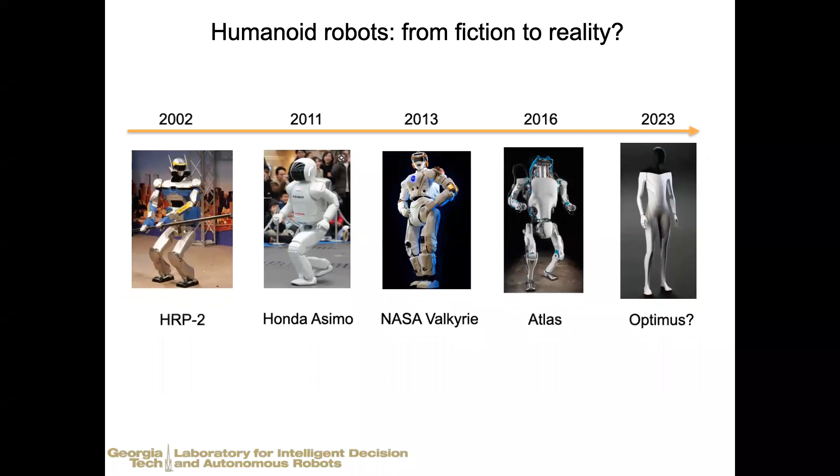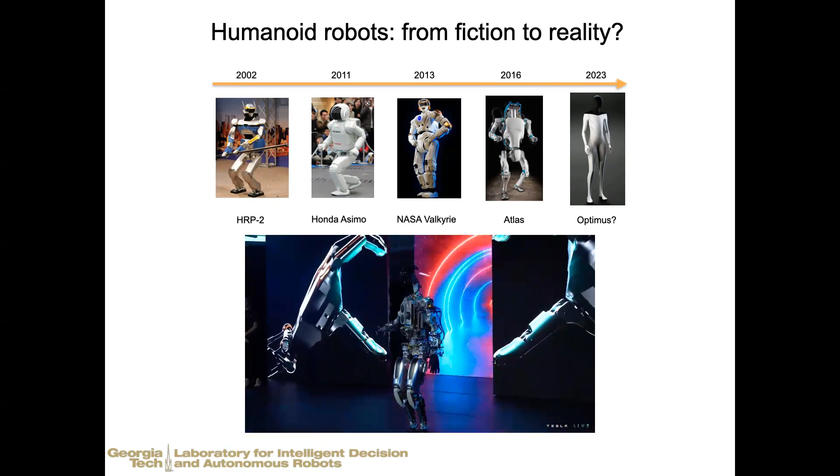If you remember last year at the Tesla AI Day, Elon Musk and his team released their first prototype of the Optimus humanoid robot. Although this first prototype still integrates a lot of existing approaches, like foot placement planning, whole body control, sensing and perception, it's still very impressive. They built this robot from scratch within just 9 months. And hopefully with the continuous effort and dedication of Elon's team, they can really impress our society over the next few years with more mature humanoid robots and behaviors in very complex environments.

Many people in this room are probably seeing a lot of cool videos these days from either Boston Dynamics or Agility. As we can see here, these robots can demonstrate very agile dynamic behaviors in outdoor environments. But there still exist many fundamental challenges at either the theoretical or experimental levels. First, as we know, the dynamics here are highly complex: high dimensional, nonlinear, and underactuated. And a lot of practical issues exist in the real system, such as actuator dynamics, delays and friction, etc.

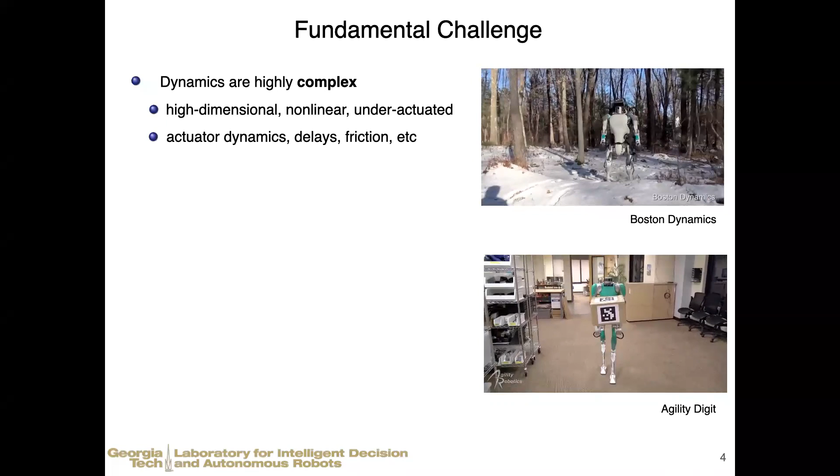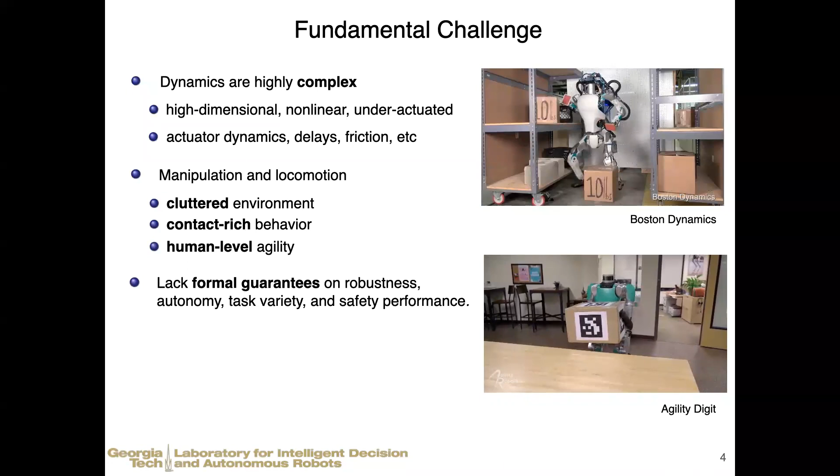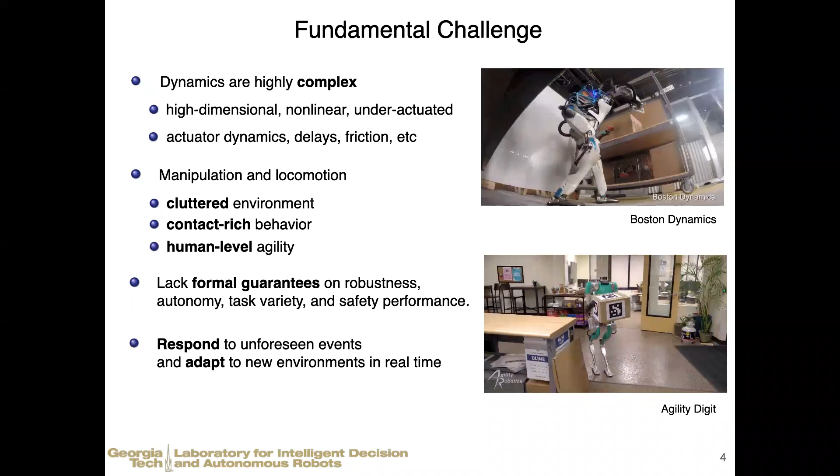And many manipulation and locomotion approaches nowadays are still a little bit far away from the capability of operating in cluttered environments, achieving contact-rich behavior reliably, or even getting close to human-level agility. From the algorithm perspective, many existing approaches still lack formal guarantees on robustness, autonomy, task variety, or even safety performance. So it's very important for us to propose new algorithms such that these robots can respond to unforeseen events reliably and adapt to new environments in real time.

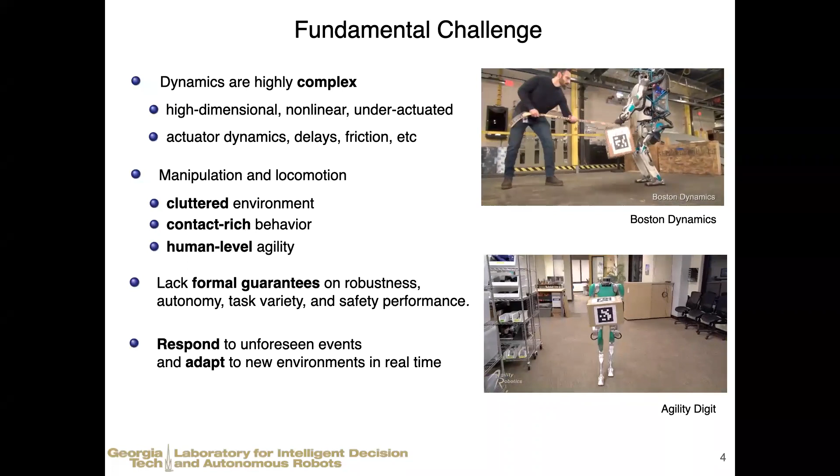So I direct the Laboratory for Intelligent Decision and Autonomous Robots at Georgia Tech. We call it LIDAR group. And we have a large focus on robust task and motion planning, decision-making algorithms for highly agile and dynamic robotic systems, especially on locomotion and manipulation.

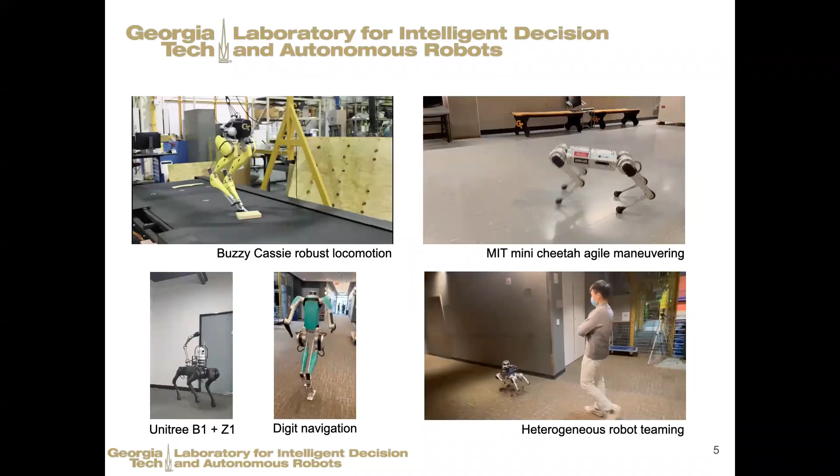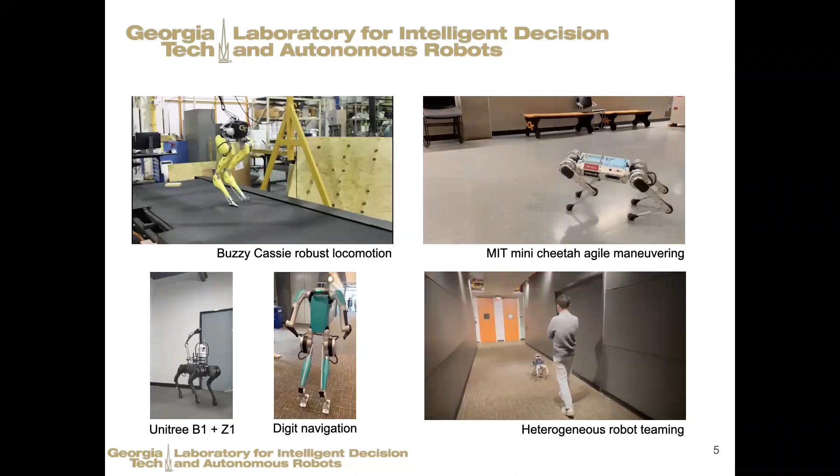And we are particularly interested in contact-rich problems where you have deformable, non-rigid contact or even patch contact problems, as well as heterogeneous robot teaming with hierarchical task, motion, or even mission-level behavior reasoning, replanning, to achieve robust capabilities.

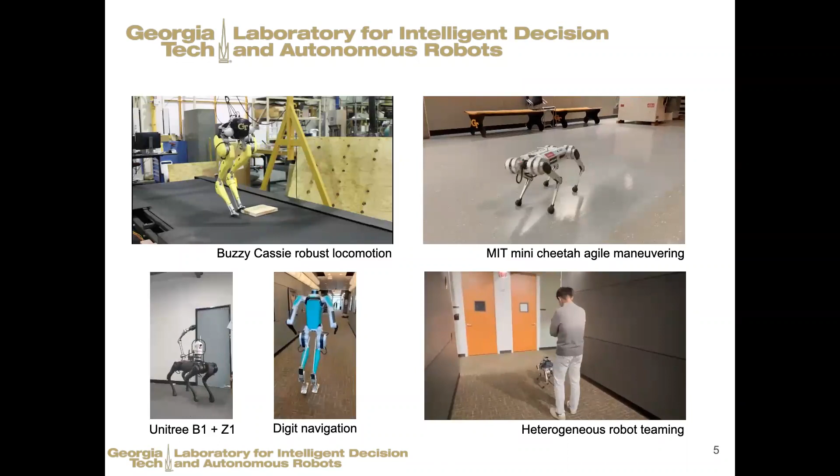So from a very high-level perspective, a fundamental problem we are interested in is what planning and decision-making algorithms do legged or manipulation robots need to achieve agile, robust, safe, or even collaborative behaviors, especially through physical contact. So in today's talk, I'm going to particularly address two questions. One is about hierarchical task and motion planning structure, and the other one is about distributed trajectory optimization.

So the first question is about how we can design this hierarchical TAMP architecture to better reason about robustness, safety, or what people call failure recovery. And I think many times formal guarantees such as safety and provable correctness are only reasoned at a specific layer and really cannot be guaranteed across different planning and control layers. So in this case, how can we design resilient and robust mechanisms to enhance the overall safety and task success rates if we cannot provide 100% safety or even prove it?

And the second question is about trajectory optimization. I would like to talk about some distributed optimization work we have been focusing on these days, and its capability and limits in achieving dynamic consensus, especially for large-scale nonlinear programming problems. So hopefully I can convince you these are important questions to explore by the end of this talk and show some promising results we have achieved so far, if they are not the best ones.

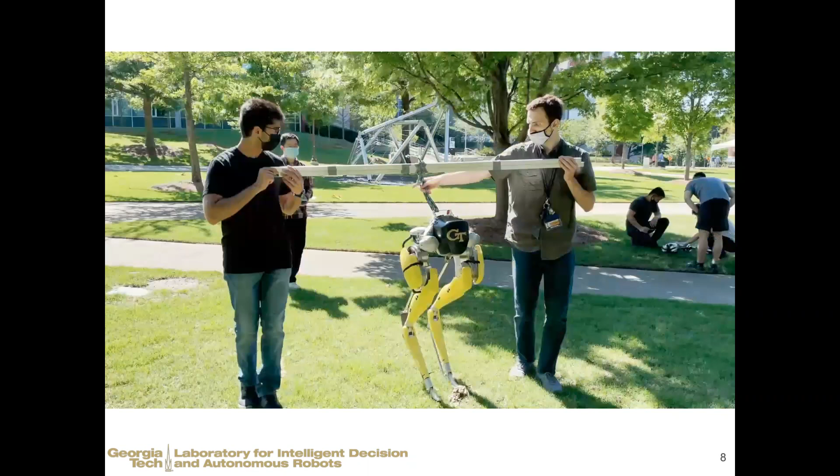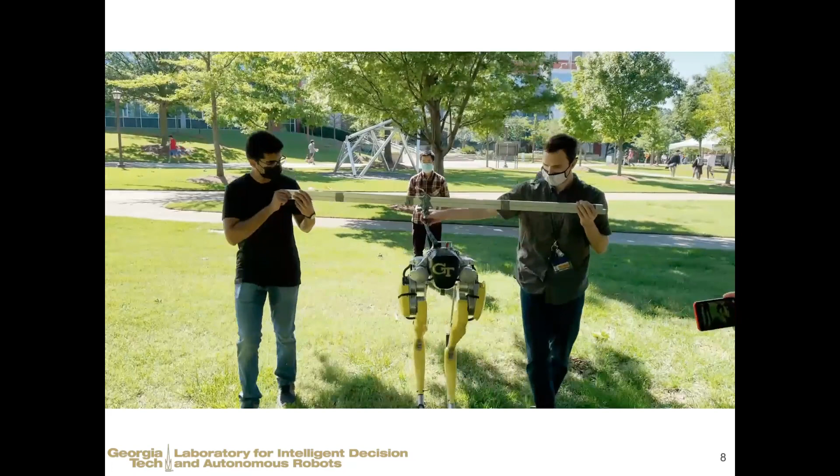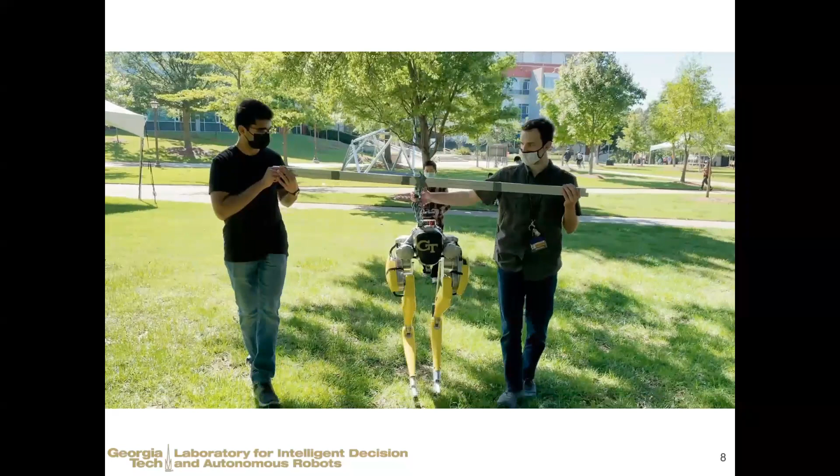All right, so as some of you already know, in the field of dynamic legged locomotion, a series of exciting planning and control frameworks has been proposed, for example, optimization-based planning and control approaches, whole-body operational space control, hybrid zero dynamics, sequential composition, you name it. However, most of these locomotion frameworks have rarely investigated formal decision-making and task planning methods, primarily due to the very challenging underlying complex locomotion dynamics at the lower level.

And these formal decision-making and task planning methods actually have great potential in enabling long-horizon tasks over diverse terrain, as well as very proactive interactions with complex environments or even humans. And so far, these methods have been primarily explored for ground mobile robots, aerial robots, and some manipulation problems, but largely underexplored for legged systems.

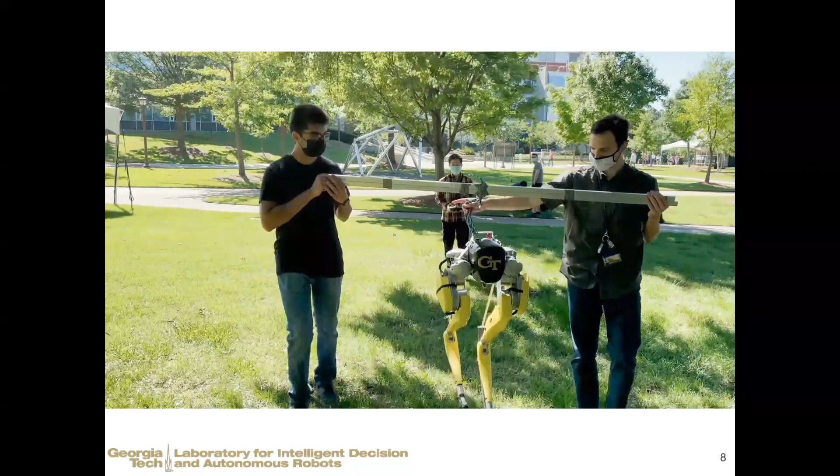So over the past few years, my group has been putting significant effort in this direction, especially for dynamic locomotion problems. So first, I would like to highlight some of our TAMP work. Since 2016, we started to look at what we call the unified whole-body locomotion and manipulation problem from the task and motion planning perspective. We formulate the whole-body locomotion planning problem as a two-player game between the robot and the interactive environment. And here the environment could be adversarial.

For example, you see in this simulation, terrain could get crashed, or a human appears in the scene as an obstacle. And the goal here is to synthesize a winning strategy such that the robot can always win the game, basically meaning successfully maneuver in this very constrained environment. And we employ a formal method called the linear temporal logic approach to synthesize reactive planners, especially to make decisions for the robot contact sequence.

And to really achieve dynamic maneuvering, a fundamental question is how to intelligently identify and compose these complex motions, right? And this motivates us to investigate this template-based agile locomotion method. Here we refer a lot to human motions, especially those seen in parkour and gymnastics. Then we extract the essential dynamics and model the abstracted behaviors.

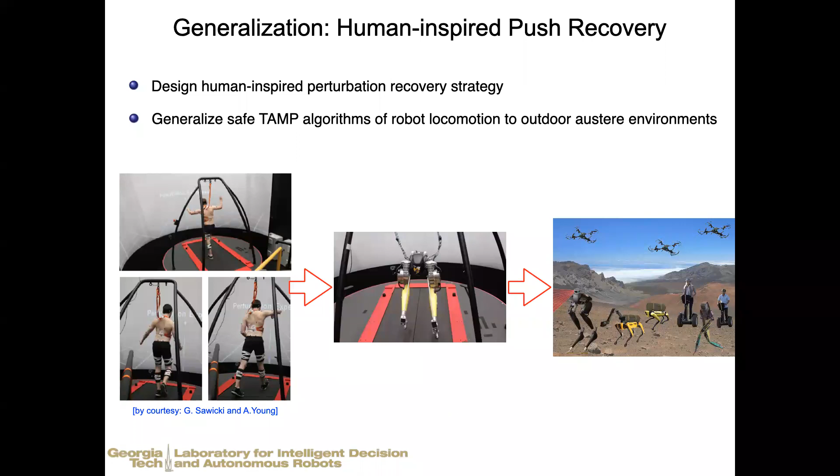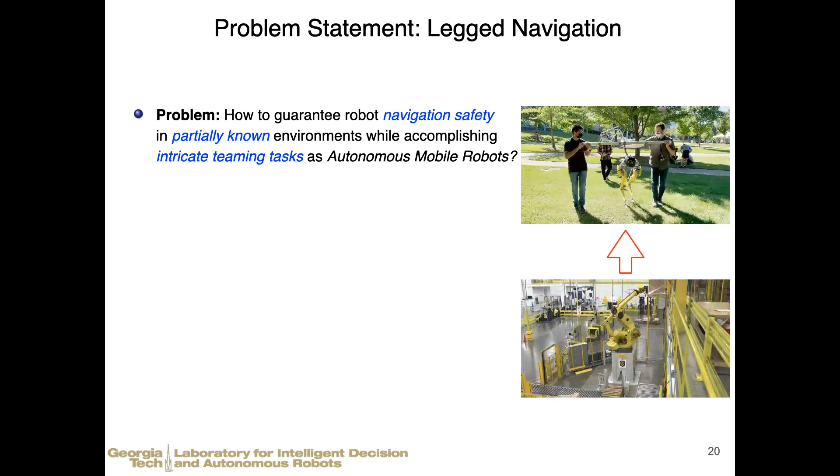So next, I would like to switch gears towards the navigation problem and think about more complex environments. And here, a central problem we are interested in is how to design planning strategies such that the legged robots can locomote safely in partially known environments and at the same time achieve complicated tasks, as we already saw with the autonomous mobile robots in warehouses.

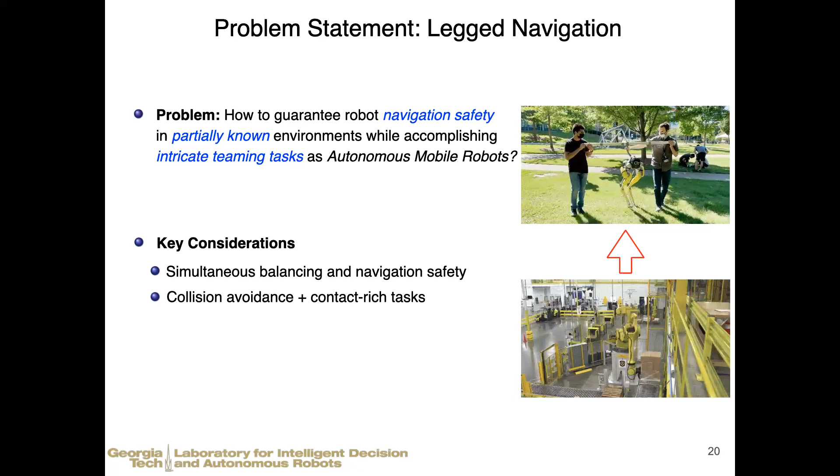And there are multiple key considerations. First, this locomotion system needs to consider not only balancing safety, but also navigation safety. So for example, the robots should be able to avoid collisions with other obstacles or humans in the environment. And at the same time, it should plan its foot contact locations correctly and make sure it's balancing well.

Another key component is the environment, which often involves rough terrain and partially observable features. And many times the robots only have a local field of view. In this situation, how are we going to parameterize and abstract the environments? Do we use fine or coarse abstractions? All this is going to give us different computational workload and different planning capabilities.

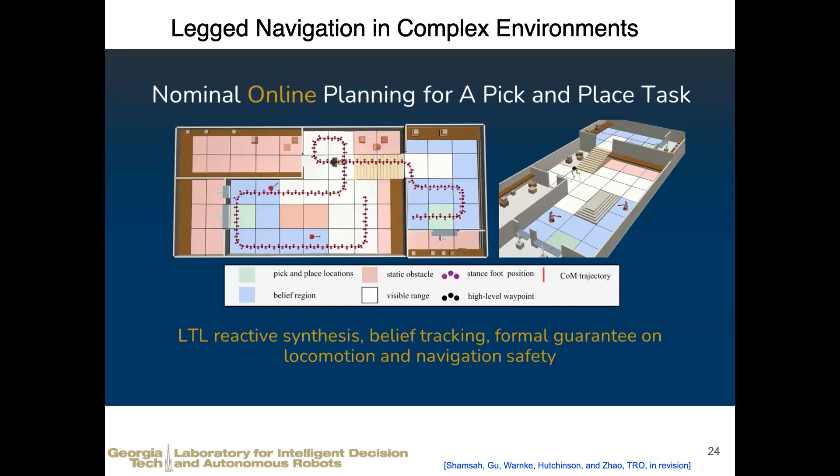With this belief tracking, we formulate this navigation problem again as a two-player game between the Cassie walking robot and the environment. Here, the environment has the mobile robots treated as one of the uncontrollable environmental actions. So the walking robot Cassie is required to visit the pickup location at the upper level and move to the destination at the lower level infinitely often, while avoiding collisions with other obstacles, which are the other mobile robots

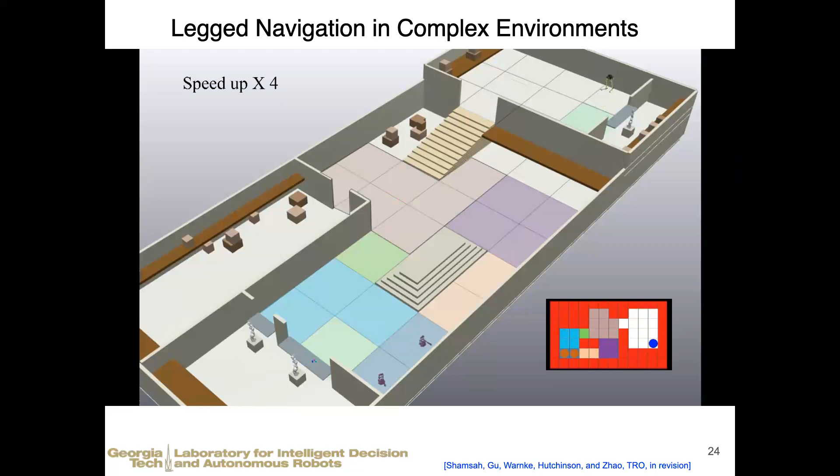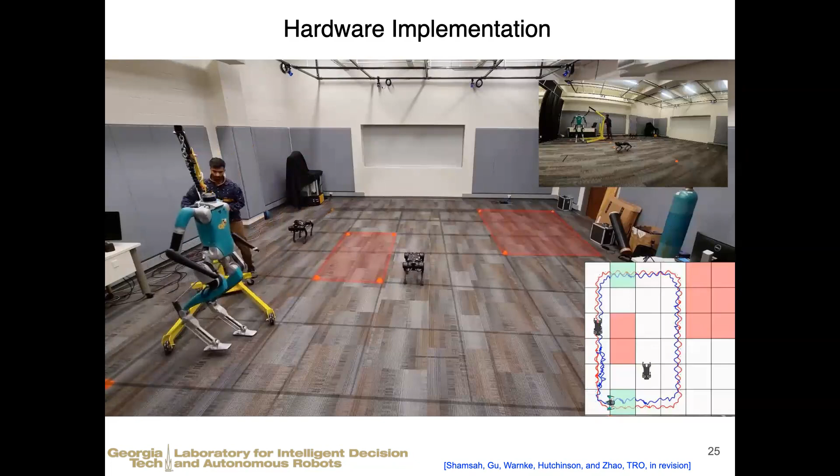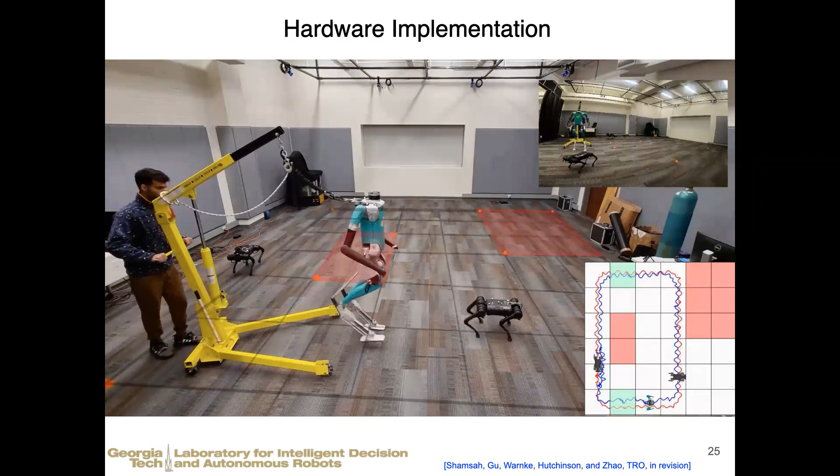We also implement these navigation algorithms on our Digit robot. This is actually a successor of the Cassie robot you saw previously; both of them come from Agility Robotics, and the leg kinematics and dynamics share a lot of similarities for these two robots, except that Digit has an ankle roll actuation, which is actually very helpful for achieving reliable turning behaviors.

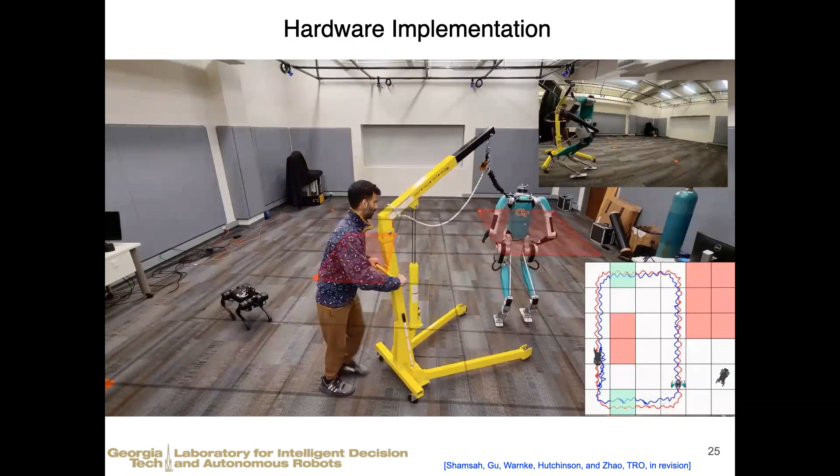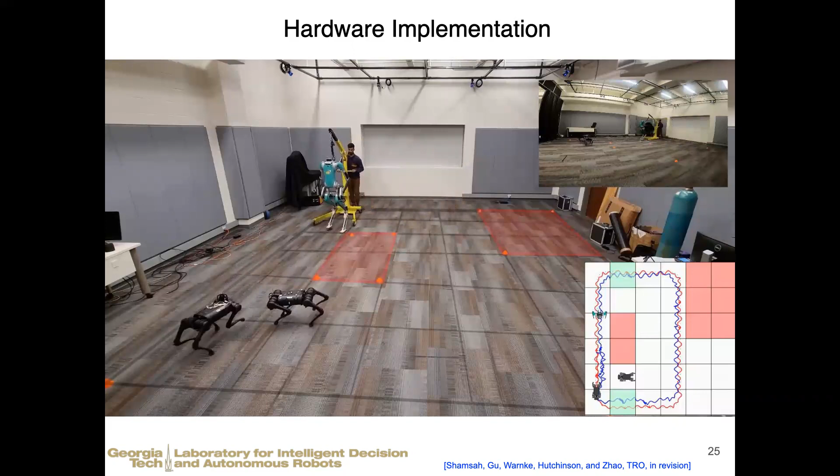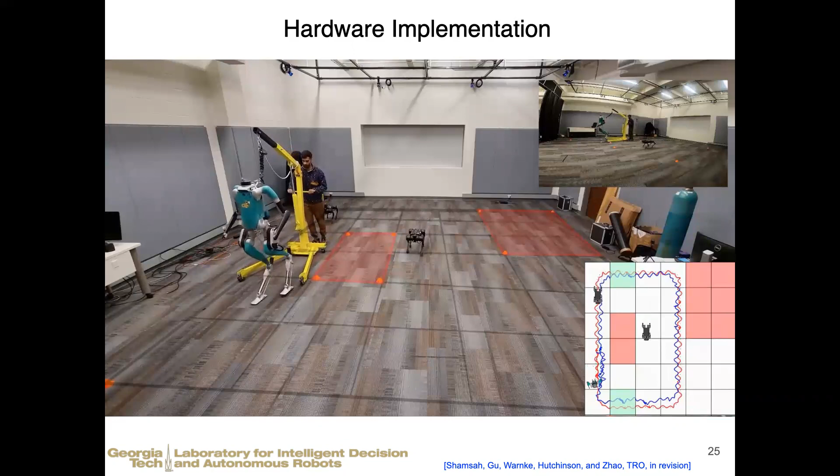Here, the quadruped robots have their own task and are treated as dynamic obstacles. With the whole-body passivity-based controller for Digit, we can successfully achieve these navigation goals from the task and motion planning framework. This is just a proof of concept, and we are actually working on more complex environmental navigation scenarios where there could be more aggressive obstacles, static obstacles, maybe blocking Digit's field of view, etc. So please stay tuned.

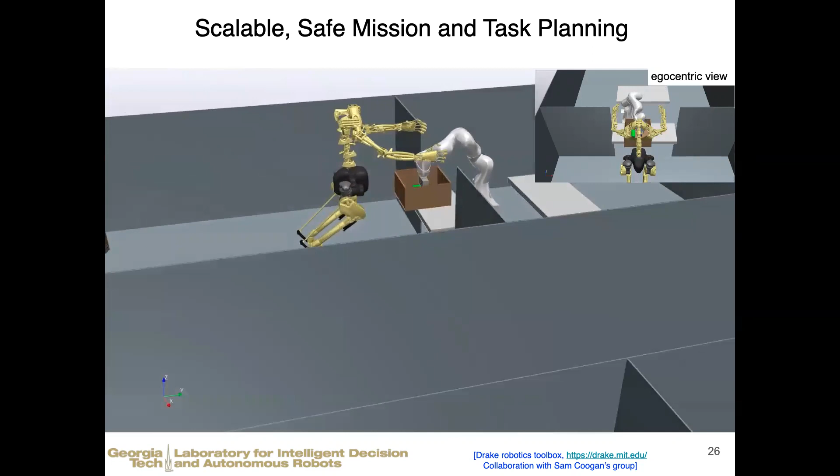Another direction of our lab these days is to explore even higher-level planning problems. We call this scalable mission and task planning, especially for long-horizon robotic tasks. So think about having a robot manipulator start to sort objects into a box. After that, the walking robot is going to pick up the box and deliver it to a destination downstairs. This is a fairly complex planning problem due to the long-horizon nature and the highly heterogeneous robot team in the scene.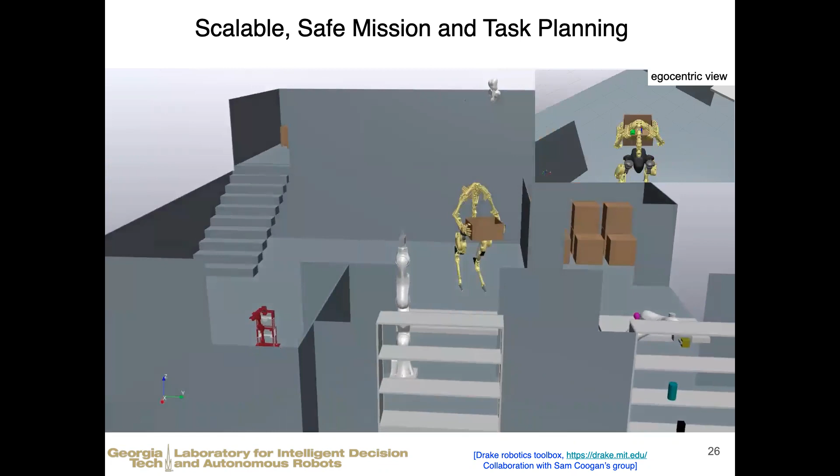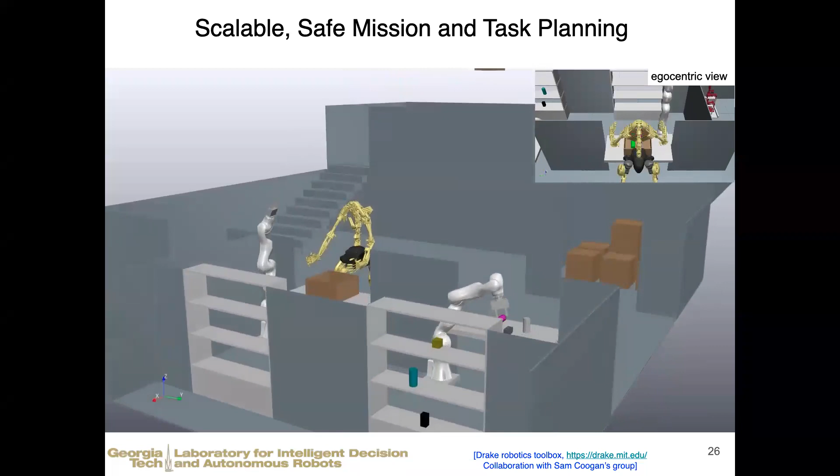Some key research questions we are addressing these days are how to make correct contact decisions with the manipulated object and at the same time avoid collisions with the dynamic obstacles in the environment. So we are targeting both contact-rich and collision-free problems in this scenario. From the high-level mission planning perspective, we are looking at problems like how we can design decomposition algorithms such that this multi-agent system can be decomposed into multiple robot subsystems while guaranteeing the global task specification for the entire team.

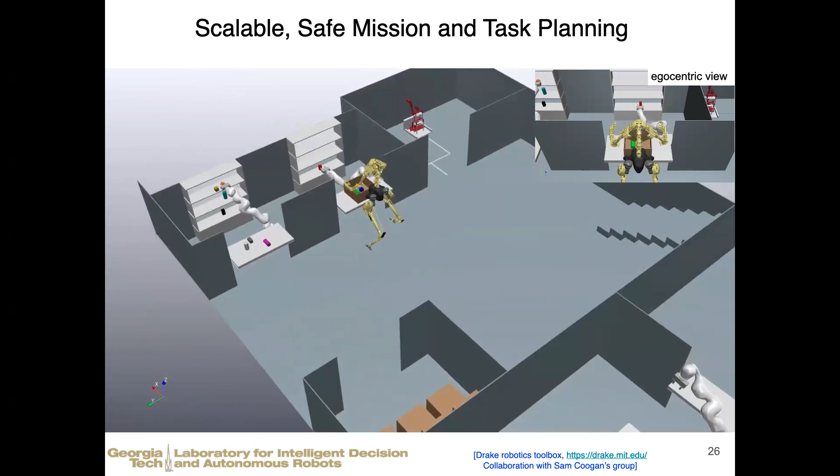But there are fundamental challenging problems from the underlying dynamics of the walking robots and the contact problems for the manipulator. So I think this is still an open area we would like to explore in the near future. But I want to point out one limitation of a lot of temporal logic-based formal methods. These methods often impose very strong assumptions on the allowable environmental events, which many times might not be consistent with the real physical world, right?

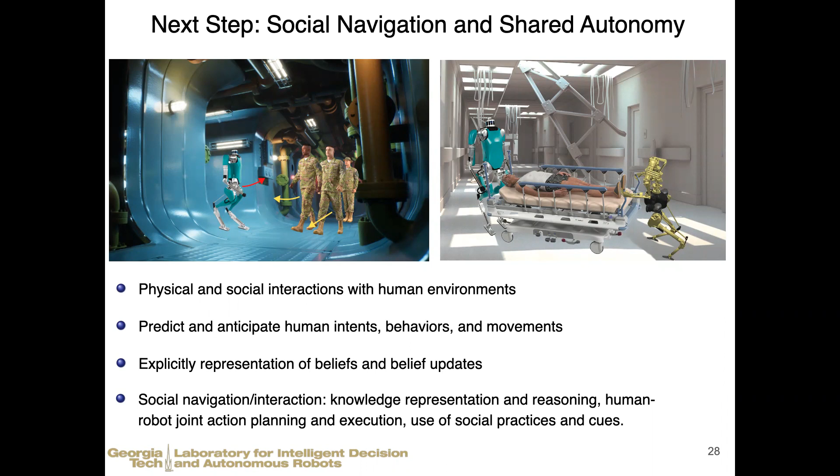And there are a lot of interesting topics: how to predict human intentions, how to represent human knowledge and reason about it, and maybe use social cues in practice. And we would like to investigate these directions, especially in the context of navigation and locomotion.

Okay, so I would like to maybe stop here for a second if there are any questions before moving forward. Doesn't seem so, no? Yeah. All good. Okay, cool. I think we can continue and leave questions to the end.

All right, so next I would like to talk about something different. Our lab has a large focus on full body dynamics-based planning problems, especially trajectory optimization, and we think about how we can decompose holistic trajectory optimization problems into multiple sub-problems and then achieve dynamic consensus, and talk about its capability and limitations. So I would like to put this in the context of momentum-aware trajectory optimization, because angular momentum is very important when these robots achieve very agile and dynamic motions.

In the literature, there has been a large body of work using so-called single rigid body models, or people propose extended versions like 3-body or maybe 5-body models with different levels of model abstraction. And some other works even use neural networks to learn time-varying momentum inertias, etc.

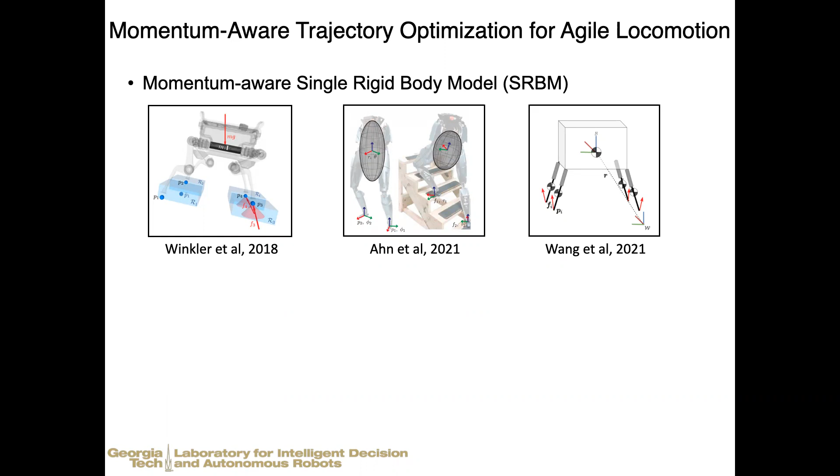On the other hand, quite a few research labs have proposed the alternating direction method, basically decomposing the entire trajectory optimization problem into 2 or more blocks and alternating between them to achieve dynamic consensus, which actually shows great promise for solving more complex planning problems.

However, I want to say there's still no alternating mechanism framework that can really handle contact sequence optimization while being aware of both inertia-aware centroidal momentum and whole body dynamics all at the same time. In this work, we propose an alternating method for full body trajectory generation offline to achieve this dynamic consensus between centroidal and whole body dynamics.

And then at the lower level, we have a convex MPC with the full centroidal dynamics for online tracking. This work is led by my student Ziyi and Bruce from Hutchinson's lab. But in this talk, I'm going to mainly talk about the trajectory optimization part and discuss the distributed optimization structure design.

In general, when we solve this large-scale constrained trajectory optimization involving both centroidal and whole body dynamics, there is usually a long list of equality and inequality constraints to be dealt with. Take a look at this problem, right? How complex this formulation is and how many numerical problems it can probably induce from this holistic optimization perspective.

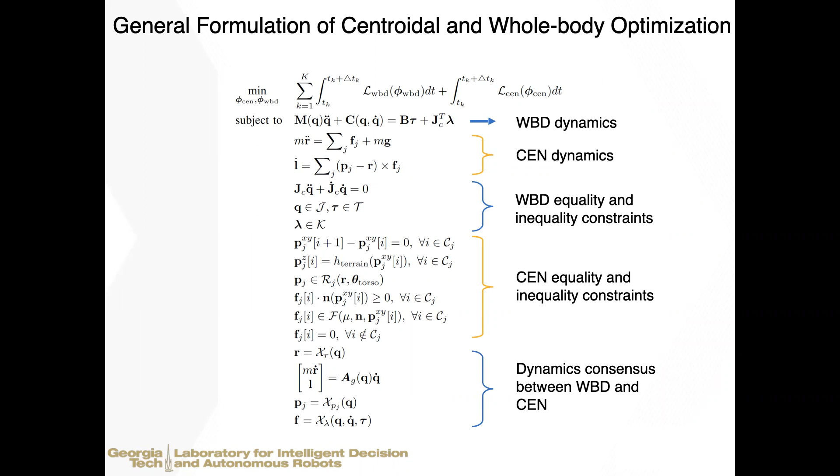And we certainly need to think about whether there's any internal structure we can leverage in a principled way, or maybe decompose the problem in a distributed fashion into multiple blocks and solve it in a distributed fashion, right? And this is our proposed alternating algorithm between the centroidal and whole-body optimization. Overall, the centroidal and whole-body optimizations are solved alternately until consensus.

And here are some details of the centroidal optimization. Instead of solving the single rigid body model, we use a centroidal dynamics model with the so-called equimomental ellipsoid parameterization, including the ellipsoid's size and orientation, which is denoted as I_ellip.

In this study, we add a cost term to let this I_ellip track another moment of inertia term, I_CRB. This is the reference composite rigid body moment of inertia calculated from the whole-body optimization, and this cost is shown in this red box. So here, the equimomental term basically means there's an equivalent ellipsoid that has the same moment of inertia as this composite rigid body moment of inertia I_CRB.

And the nice thing is that now these centroidal ellipsoids can get rid of the direct dependency on the full body joint states, right? But at the same time, it sort of indirectly incorporates the full body information through tracking this ICRB. And you can think about this centroidal momentum ellipsoid as a more advanced and dynamics-consistent version of the single rigid body model, but without any simplifications. And at the same time, we have ellipsoid mass constraints enforced to make sure the robot mass always remains the same.

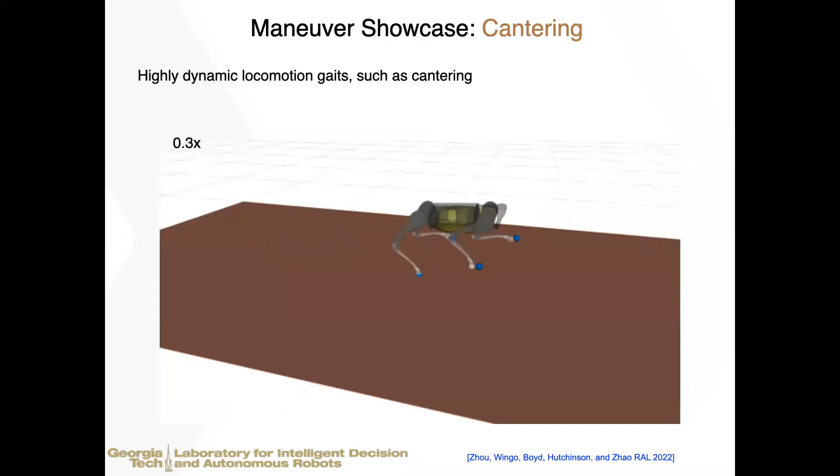And here we solve this whole body optimization problem through differential dynamic programming, DDP, and we use Crocoddyl as the underlying solver. And then we evaluate this algorithm for both Mini Cheetah and A1 robots. Our method can generate highly dynamic locomotion gaits, such as this cantering, as well as this long aerial phase for these dynamic parkour maneuvers. And this is actually a very interesting one to differentiate from the single rigid body model or the traditional centroidal momentum model, which heavily rely on the ground reaction forces.

Here we study this zero gravity body reorientation problem, which is actually called inertia shaping. So you might have seen videos of astronauts doing self-rotation in the International Space Station. So this is a similar scenario. And because there's no gravity, all external contacts are absent in this problem set. So the robot is forced to rely on its limb motions to produce this turning behavior. The robot starts with a static initial configuration, and the goal is to turn its trunk by 90 degrees in 2 seconds. And this is really unachievable by the traditional single rigid body or centroidal momentum models, which, as I said, rely on the ground reaction forces.

We also benchmark the performance of our approach against the single rigid body method plus inverse kinematics as a baseline approach. Here we do this 180-degree spinning, and we see both methods can actually generate these trajectories pretty well, as shown in this visualization. But if we take a closer look at this scenario, we can see our alternating optimization algorithm actually leverages additional leg movements, especially during the takeoff phase, which leads to a larger angular momentum. And this larger angular momentum actually induces a very special rotation motion at the very beginning of the takeoff phase, which plays a key factor in successfully accomplishing this task in hardware.

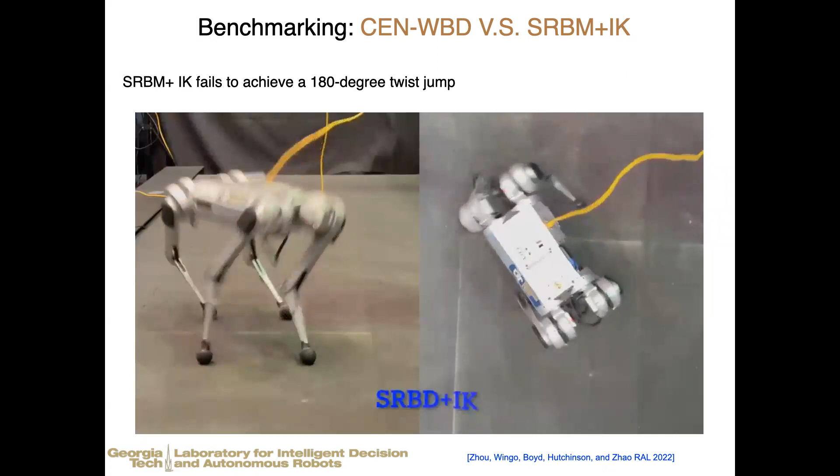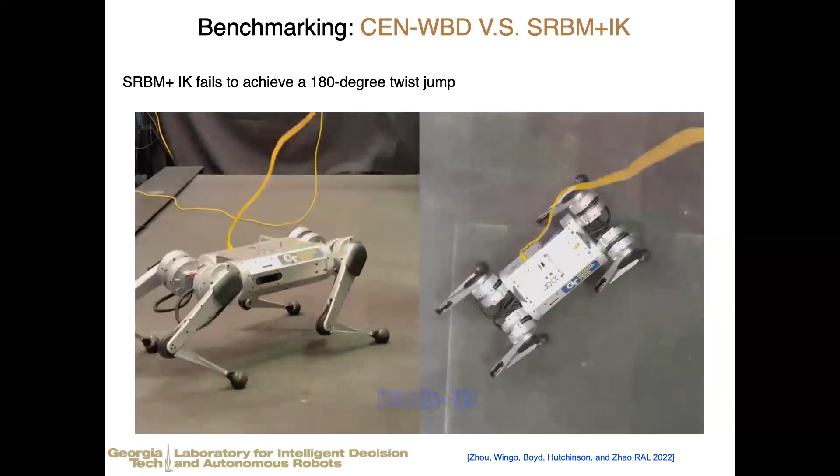And when we implement it on the real system, we're using exactly the same controller for both planning methods, and the trajectory generated by the single rigid body model really cannot achieve this full 180-degree rotation. And if you look closer at the motions using our method, the robot has this initial swift counter rotation at the very beginning phase. And this small but non-trivial change of the angular momentum actually guarantees a high fidelity momentum trajectory to be tracked by the underlying controller and achieve this 180-degree turn.

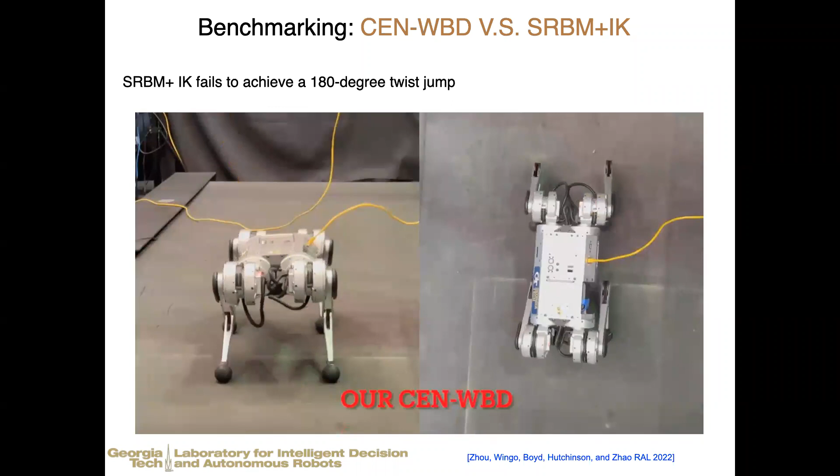And I want to say this angular momentum change is completely solved by our trajectory optimization without any manual hand tuning. So this is the beautiful part of using an optimization-based planning approach to generate highly dynamic and momentum-consistent motions. We also have more hardware tests on the MPC controller, but I'm going to skip it.

We also benchmark the consensus performance using our alternating method against a more traditional hierarchical architecture, where the centroidal momentum module sends all the signals to the underlying whole body optimization in a single top-down direction, right? But our approach alternates across two blocks. And by examining the residuals for different reference tracking cases, such as center of mass, end effector, and angular momentum residuals, we can clearly see that our method actually outperforms the hierarchical one in all cases. And I think the reason is obvious, because our method uses this alternating mechanism to achieve better consensus between the centroidal and whole body dynamics and gives us more consistent results.

Okay, so before closing this talk, I would like to pose two questions and have some discussions here. So first, this alternating direction method is promising for better consensus. So can we really generalize it to more complex problems, such as those involving physical contact? And the answer is partially yes.

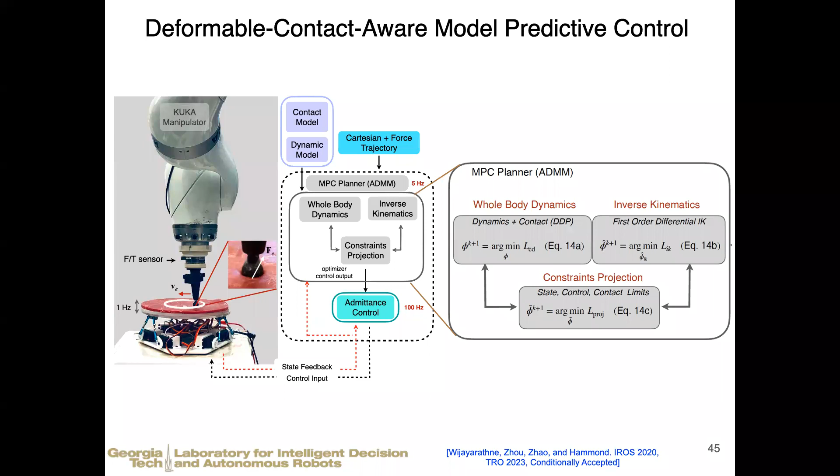So recently we have some other works generalizing this alternating direction method to real-time MPC for manipulation with deformable contact. I don't have time to talk about the details, but the key point is that we can have more blocks to handle not only the whole body dynamics, but also the physical contact models. But this is just a 7 degree of freedom robot manipulator, which is not as complex as humanoid robots, although the deformable contact part induces some physical complexities.

So what about more complex dynamics, even incorporating the contact physics, like people try to impose linear complementarity constraints, which are very difficult to solve. Or you definitely have higher degrees of freedom robot dynamics. So how can we achieve dynamic consensus in a more efficient way? Currently, a lot of these alternating or distributed trajectory optimization methods still largely depend on, or are restricted by, the numerical convergence performance.

And there might be more fundamental problems we should look at from the optimization algorithm structure design perspective. For example, how should we divide the entire optimization problem into sub-problems in a principled way? What is the appropriate primal dual updating sequence? I think all of these questions certainly need more investigation.

So another question is about angular coordinates. What is the appropriate representation for the angular coordinates at the centroidal level? This question seems not very related to the trajectory optimization architecture design, but actually it could potentially make a difference, especially thinking about how this centroidal optimization information is going to be processed in some blocks and passed to other blocks. So I think these are definitely related questions.

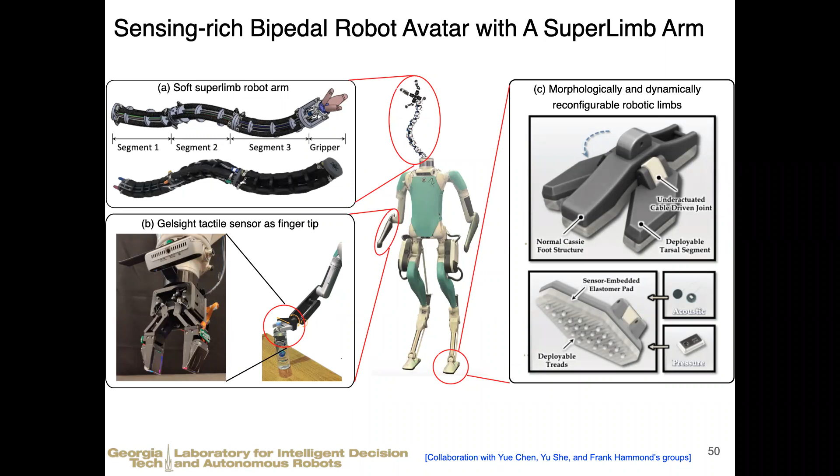So at the end, I just want to give a highlight. This is kind of a new direction along locomotion and manipulation. We are designing this new sensing-rich bipedal robot avatar with a third soft superlimb arm, equipped with high-resolution tactile sensors and a morphologically reconfigurable robot foot. This new humanoid robot is going to enable very high-resolution contact sensing capabilities for locomotion and manipulation or even navigation. And we would like to explore the TAMP problem and trajectory optimization problems I presented with contact-rich sensing in the loop.

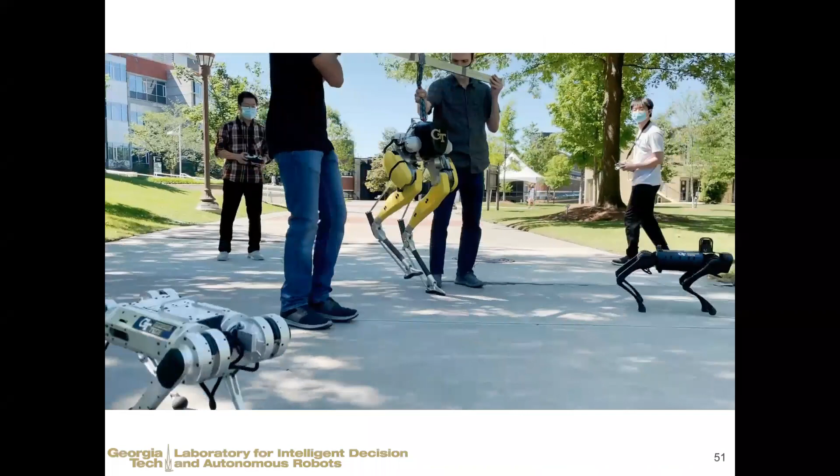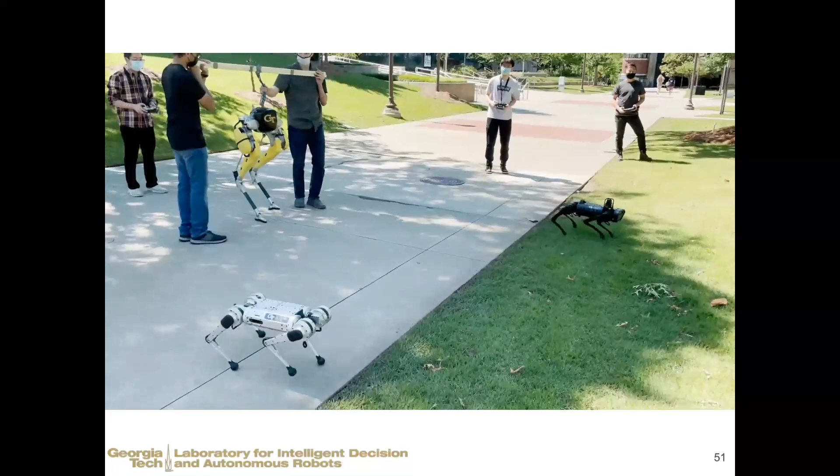So I would like to close my talk with this video. As time goes, we're really marching towards the goal of deploying a team of robotic systems in our daily life, and hopefully over the next 5 to 10 years, we are going to see more humanoid robots serving our society better, like helping us carry heavy payloads, entertainment, and really changing the way we live and work.

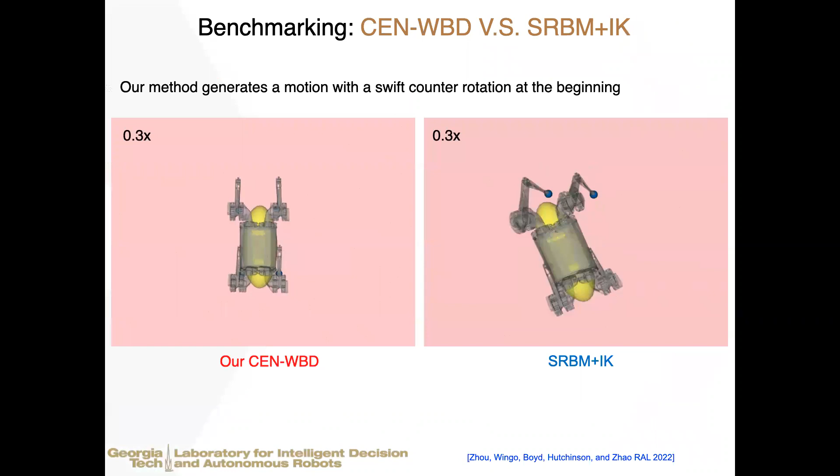Yes. Sorry, can you repeat your question? Like landing this robot and still testing. Yeah, you know, like a cat, right? So you know that cats are always able to land on their feet, right? So this really reminded me of that. So yes, take your robot also and throw it up in the air.

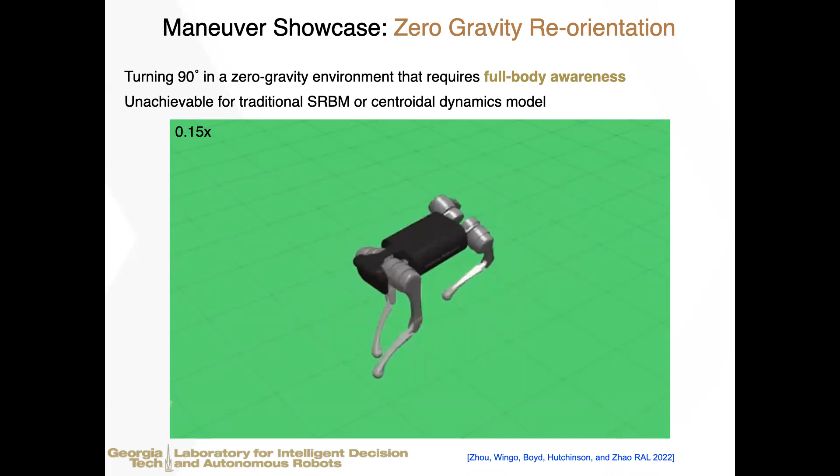Yes, this cat, and also I think other animals like a lizard, when you throw them from the air, they have a really powerful brain processing this to make sure when it's landing, it's going to reorient its body and land successfully. Yes, this is something we actually tried once in the lab, but we broke the leg because there are definitely actuation limits from the lower level.

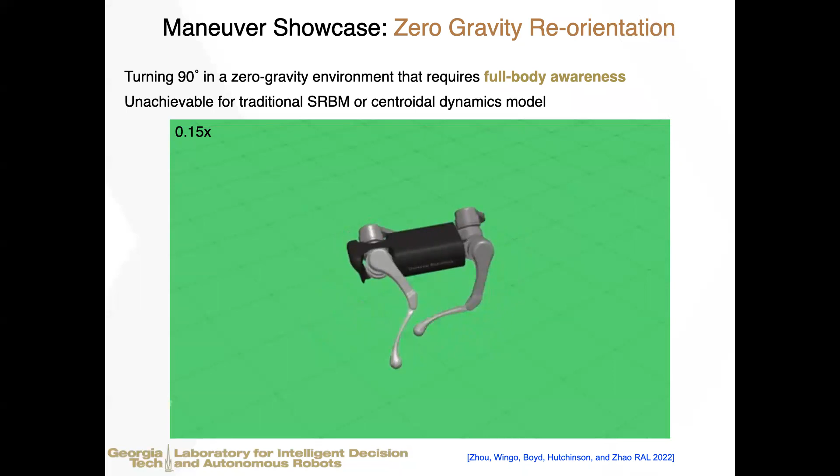But that could be a good example to validate the whole framework, right? This kind of reorientation. Right now we just reorient around the yaw direction. But if there's more aggressive motion, I think that's a really good example to test what we call the angular momentum trajectory optimization.

Right, because this is a classical example when people talk about non-holonomy, for example. So that is a typical example: the cat that, just by doing internal motions, can reorient itself. If you can do a practical demo, it would be awesome. Maybe even in simulation, where you can see that without breaking legs or something like that. Yes, I would love to see it.

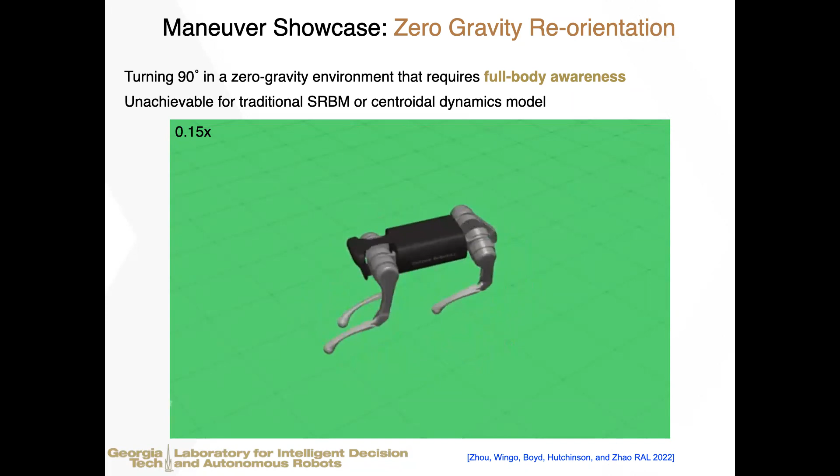Yeah, we got the Mini Cheetah recently, and I think that's maybe a more reliable platform to try this type of task. But previously, when we tried it on a different robot from Unitree, it actually failed. And I know some USC researchers who do flipping motions and landing from a box at 2 meter height, and they land successfully. But they are testing different control or planning algorithms.

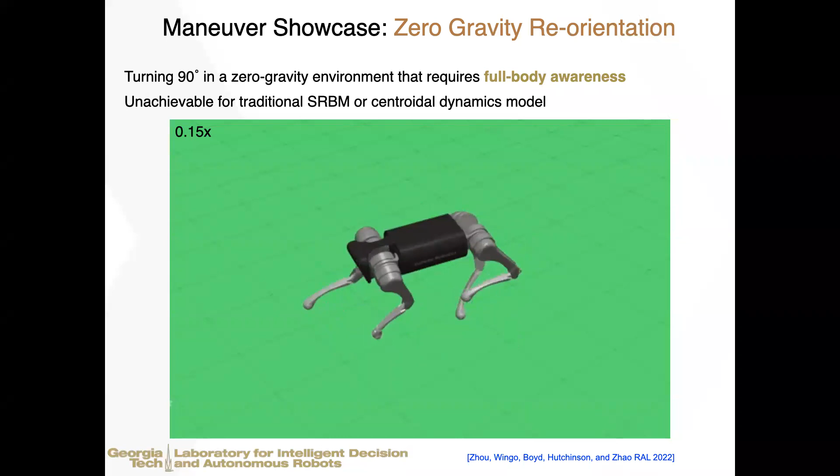Yeah, but I think that's a really good example. We should really try it out and think about the powerfulness of the algorithm we are proposing here. Yeah, that's a good point. I will talk to my students later. I would love to see it.

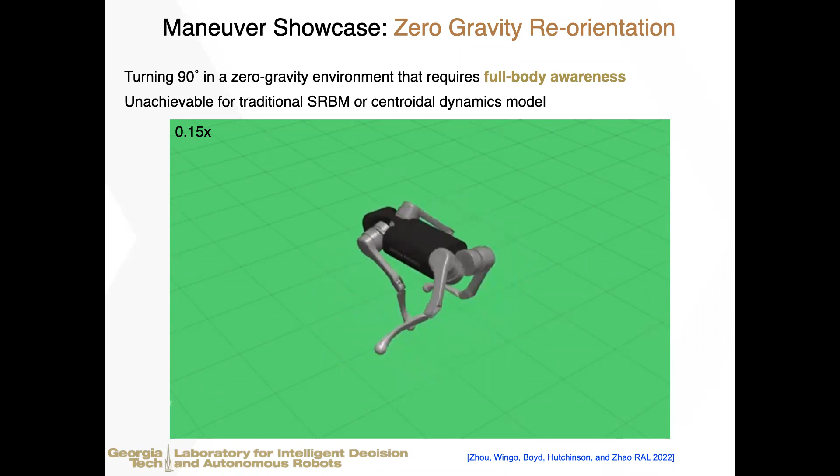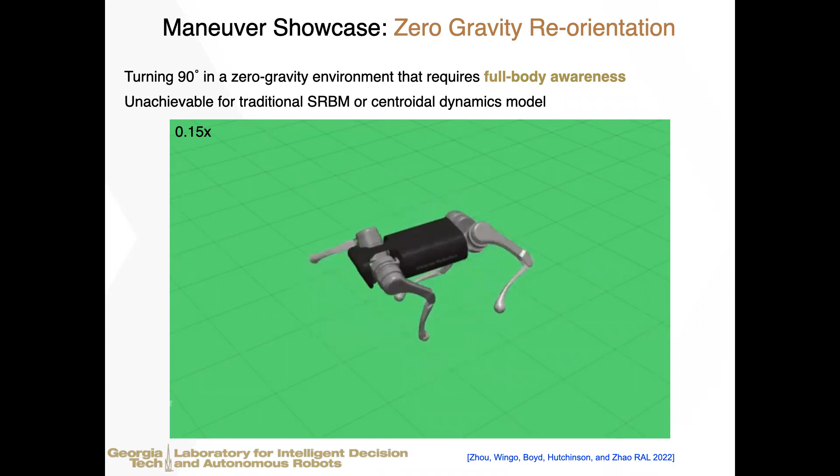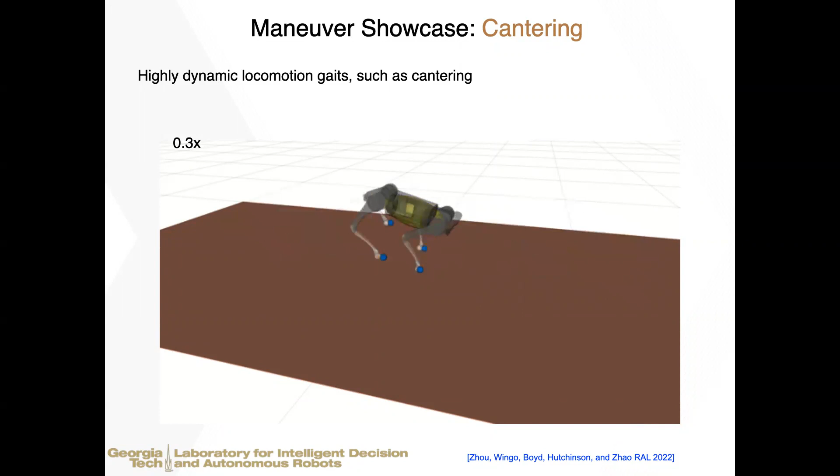Now, do you use any pre-computed gaits in your optimization? What do you think is the role of something pre-computed? Yes, definitely. For this cantering motion, we actually use mocap data from open source datasets. But in general, this algorithm doesn't need to depend on a predefined contact sequence. One of the specialties of our algorithm is that by solving this optimization, we solve the contact sequence. The contact sequence is part of the decision variables of our optimization.

There is a literature in this area. People call this contact-implicit optimization or contact-invariant optimization. But definitely if you have data, expert demonstrations, that would help the optimization to converge. So yes.

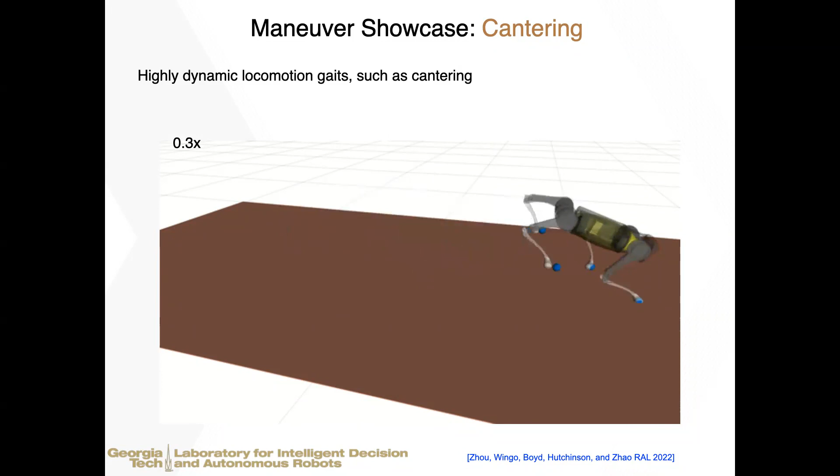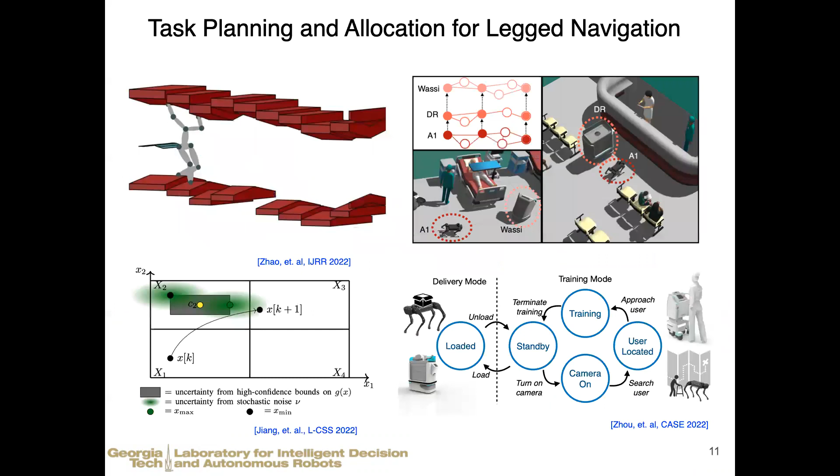Okay. And then a little bit of clarification. In your game theoretic approach, what are the actions for your adversary? Was it placing random obstacles in your path in the navigation problem? Yeah, it depends on the problem. For example, for this type of environmental navigation, the actions are the contact locations and the center of mass apex states.

In this case we use the reduced order model, so it's a set of key parameters in this lower dimensional space of the robot. That's the actions we use for this model. But you can design others depending on the task. If you have more complex manipulation problems, you can have other representations for your contact sequence.

We haven't really incorporated parameters related to dynamics, like forces, into these decision-making problems. We are trying to abstract the high-level behaviors mainly from the kinematic or geometric aspect. But it might be interesting to incorporate contact forces or other frictional contact properties into the high-level decisions. That's something we have not explored at this moment.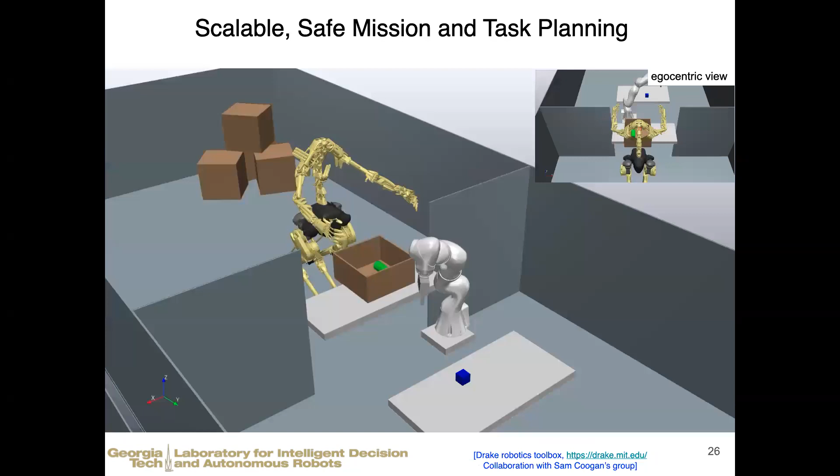There is a, I think he's asking this one. Yes. So yeah, there's kind of offline generated nominal paths of the action sequence for both robots. But the problem here we are trying to address is that sometimes the assumption you made for the environment could be wrong. So there could be like runtime emergencies or new environmental actions show up.

And in this case, how you can do the runtime modifications, right? The runtime replanning to guarantee you can still accomplish the task. So this is the main topic for this work. But yes, we do have a nominal path action sequence we want the robots to accomplish in the nominal environments, but we are considering the emergency environments in this study.

Okay, thank you. And there is another question, which is, can a model-free controller be combined with symbolic planning and distributed optimization methods to enhance the robustness and safety of the locomotion? This is a more general question, I think. Yeah, that's a good question. I think when you say model-free controller, I assume you refer to the learning-based approach.

Yeah, we're thinking about this problem from the symbolic planning aspect. Many times these specifications are designed by human users. And if it's just a few specifications, that might be okay, and there won't be any conflict. But when you really have many specifications, especially for a team of robots, there could be some self-contradictory specifications, right? Even the human designer cannot be aware of.